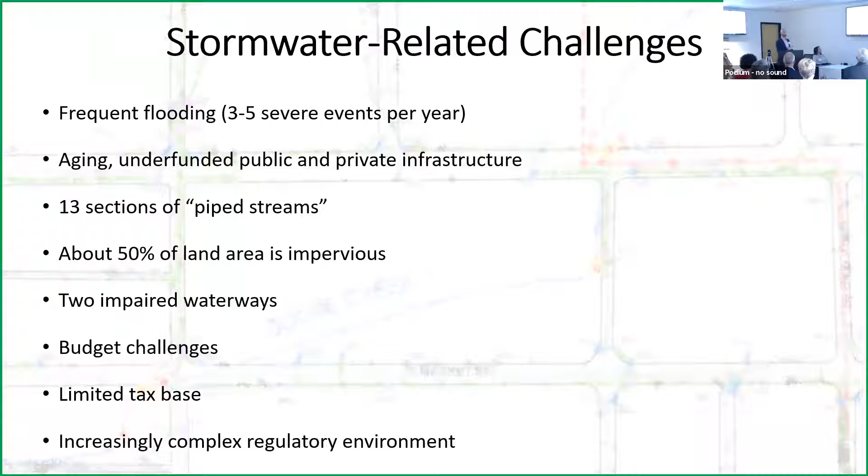We have 2 impaired waterways, budget challenges — what municipality doesn't — and a limited tax base. I think this is maybe somewhat unique to West Chester: we have a huge university campus, and it's the county seat. Those are not taxable entities. The value of the untaxable property is about 1/3 of our total property value, so in other words, we have to raise our tax revenue from the other 2/3. That's a challenge. And of course, an increasingly complex regulatory environment — in other words, here's the money-flying-away emoji.

So I talked about our impaired waterways. We have 2 pollution reduction plans with DEP. One is for about 75% of the borough, which is combined, covering the Brandywine Creek, Blackhorse Run, Plum Run, and Taylor Run stream sheds. The pollution reduction plan is to reduce the amount of sediment in those waterways.

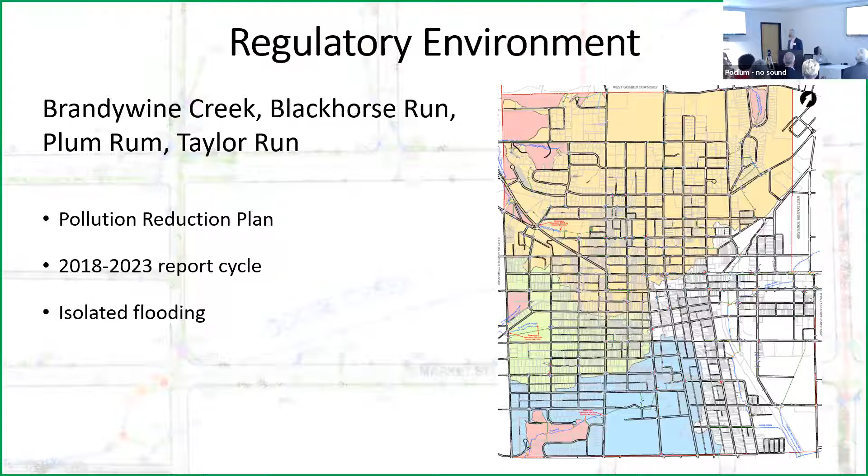And we have some isolated flooding here. A bigger problem is our Goose Creek, which actually originates right off of 202 by Paoli Pike and travels through West Goshen, comes down, and routinely floods the main route from 202 to Chester County Hospital. So we have a goal of reducing sediment in Goose Creek, and we also have a TMDL strategy for reducing phosphorus load in that waterway.

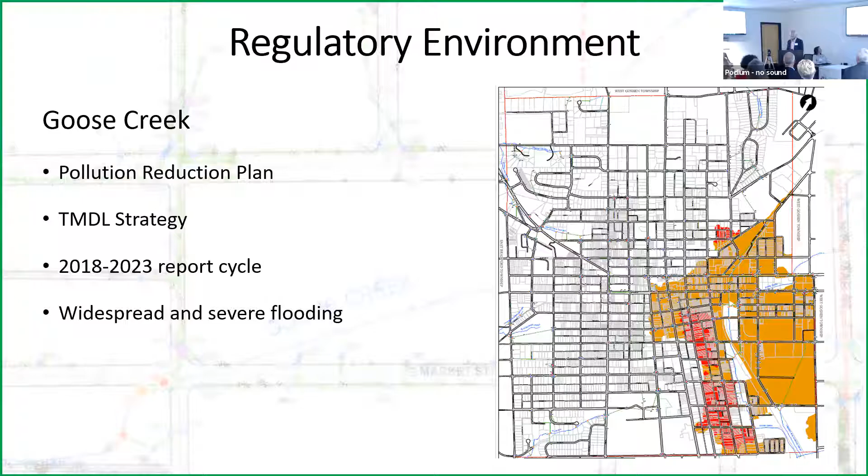Both of these are on the 2018 to 2023 reporting cycles with DEP. And with Goose Creek, we have widespread and severe flooding. However, it does provide recreation opportunities to the students from West Chester University.

So a lot of challenges. How do we address them? In 2013, the borough created a task force to look at all these issues, project costs into the future, and find a way to fund this stuff.

We looked at the existing infrastructure and the needs of maintaining that infrastructure. We looked at new infrastructure, staffing, administration, what it was going to require to get better about stormwater management. And we ended up projecting - this was a group of mostly engineers, but there were residents, there were politicians, but it was technical from the beginning.

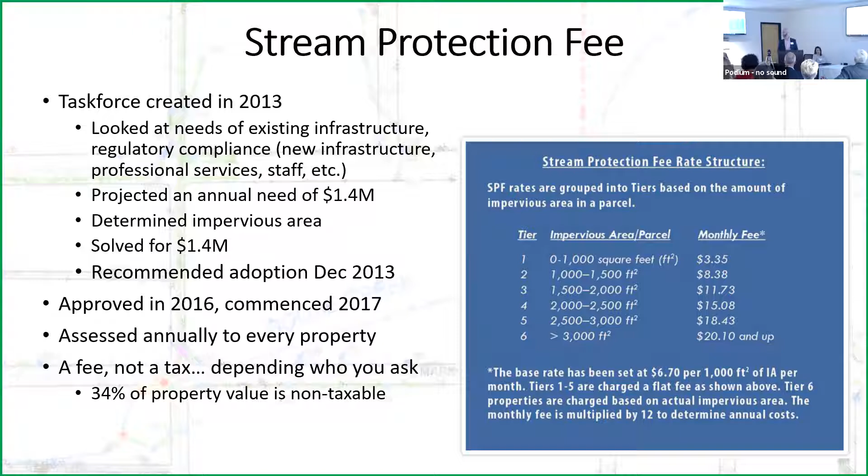And so we rolled this out in 2017, and the verbiage here is very intentional. We call it a fee, and we believe it's a fee. But depending who you ask, it's a tax. Of course, we want it to be a fee so we can assess those non-taxable entities and get them to pay into the problems that they're creating from a stormwater point of view. The university doesn't just own their campus; they own office buildings, residential buildings. They're truly an enormous real estate owner in the borough, and it was important, particularly, that the university pay into this.

So here's what it's for. On the right is the language in the ordinance, on the left is what that means day to day. First and foremost, managing the program - the MS4 permitting, plans, annual reporting. We just submitted our annual plan, which was prepared by a consultant. Illicit discharge detection and elimination, making sure primarily that the storm sewer isn't carrying sanitary sewer. That's the big thing.

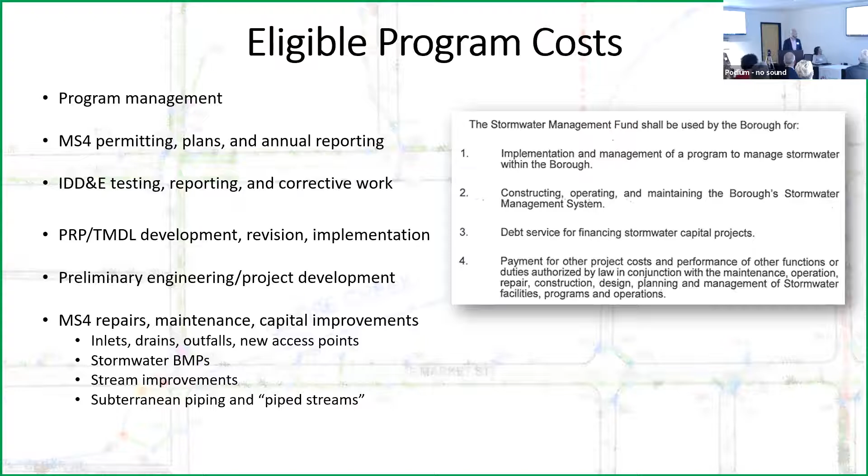Designing projects, teeing them up to actually be implemented, and then of course repairs, maintenance, and capital improvements to the existing system. This is what a typical budget looks like.

Mind you, I said we're billing 1.4, but our budget is about 1 to 1.25 million. That's because the university has challenged this in court, the fee versus tax question. Until that is resolved, and similar cases have been settled in favor of the municipality elsewhere in Pennsylvania, we're not budgeting their revenue because they're not paying it.

But this is what that money looks like year to year. About half of it goes into new capital projects for the upcoming budget year. About a quarter goes into maintenance of the existing systems. There's also bond debt up there from an original slew of projects that we did when we rolled this out.

You'll see an unfortunately large legal budget there, again going back to the university. Professional fees, that is the consultants and engineers I talked about, helping us with capital project development, capital planning, reporting, updating our reports, compliance, things like that.

We have personnel costs from public works, street sweeping in particular. That's a really high impact thing that we were already doing, but we get a lot of credit for doing it because we're taking so much stuff that would otherwise be swept into our waterways. So we were able to pay some of our public works costs there. And then admin is really a part of my time, and $11,000 for other stuff.

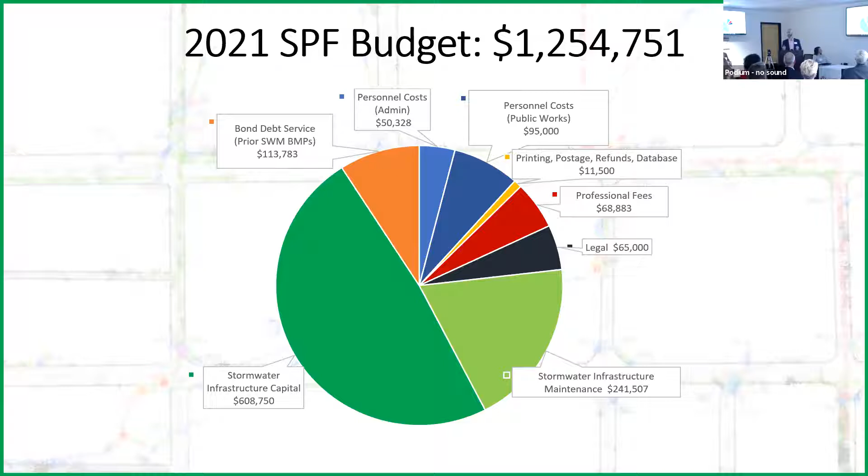Admin is less than 5%, and I'm exceptionally proud of that. That's very low for these types of programs.

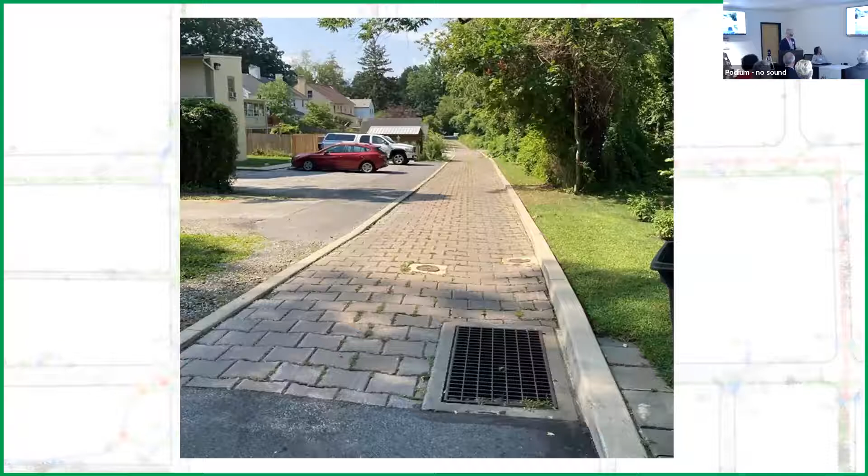So those were a couple of rain gardens. This was an alley that we completely redid, I want to say it's like 200 yards of permeable pavers. I'm not sure we're going to do more of this. We'll do it on small scale parking, or maybe a small parking lot or a couple parking spaces, maybe the downhill side of a parking lot.

But I mentioned maintenance issues. This is probably one of the most maintenance intensive. You can already see all types of weeds growing in the cracks between the pavers. There's crowning already, and if you've worked in stormwater, it's all about gravity and topography and making water go the way you want it to go.

When the road crowns, you might not necessarily be doing that as efficiently. So the left side of this alley probably doesn't drain too well into that inlet on the right side. There's a time and a place for this, but in terms of completely redoing streets with this type of solution, we probably won't do too much more of that.

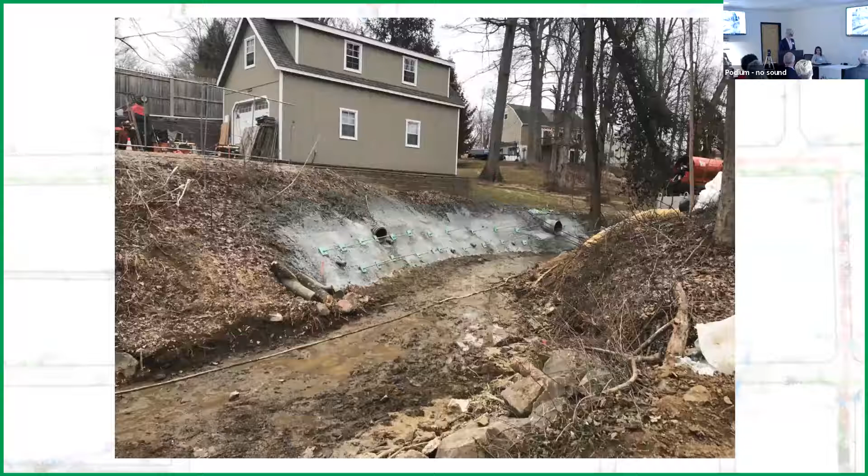This is one of our biggest projects to date. This is one section, there are 7 or 8 banks in this stream. This is Plum Run, actually. Most of this water originates on the West Chester University campus, goes downstream, totally ripping through neighborhoods after it gets to be more spread out and more suburban. So this is probably the diciest it got.

The garage was about to fall into the stream. So we did armoring and all sorts of stuff, new riparian buffers, things like that, to rebuild the bank, armor it towards heavy events, and really protect the property there.

Unfortunately, this type of work doesn't get us any credit towards our DEP regulations. I mentioned one of the things we have to do in both of our watersheds is reduce the amount of sediment in the water according to a DEP calculation. The whole purpose of this is to stop erosion, which is just sediment getting into the water, but we get absolutely no credit for doing this. This is a $700,000 project over 2 years. It was really about protecting a couple properties that were literally falling into the water. This doesn't really get us anywhere with DEP, and I think it's a little unfair, but it speaks to the challenges here.

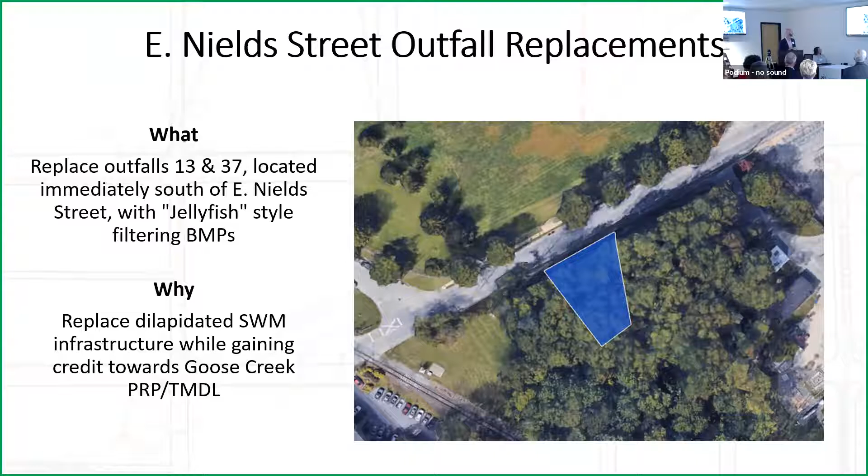Here's another one: replacing, there's a couple outfalls here, really old CMP pipe. We're replacing it with a new concrete outfall, and actually it's a big box that filters the water. There are multiple levels: the first level filters out trash, the second one leaves, and the third gets down to pretty fine particulate matter. That also gets a lot of credit towards our PRP and TMDL goals. We've never used them before, there's a pretty serious maintenance component to those, but it's a good opportunity to pilot that.

So future challenges: again, I mentioned the West Chester University litigation, very unfortunate. That's about 10% of the income we're not bringing in, and about 5% going back out the door to lawyers, which is very unfortunate. Inflation, hot topic right now, but these cost estimates are from 2013, that's 8 years ago now. So when we go to do these projects that we originally cost-analyzed almost a decade ago, we're finding some surprises.

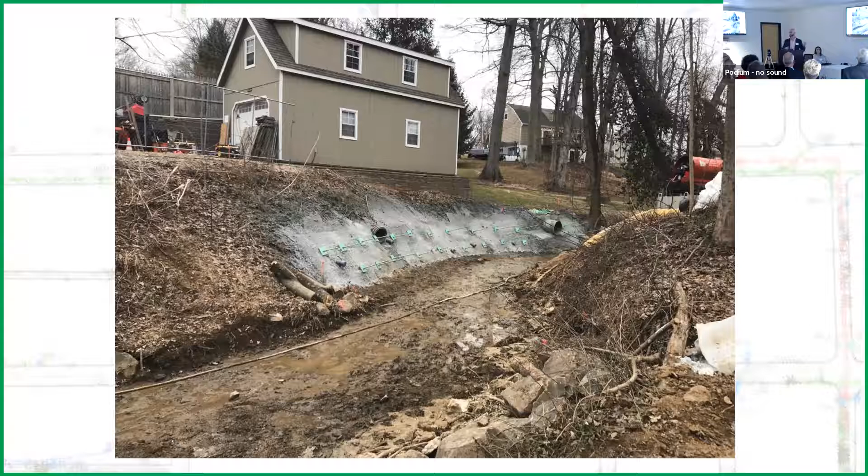Competing priorities for funding, of course, going back to this project: we have a garage on private property that's about to collapse into a stream because of stormwater mismanagement upstream. If we need to do this project or do something else to meet our PRP goals, we're going to do this project every time. But there's only so much funding, and unless we're going to raise that, we have to pick and choose between these priorities, and they're very significant priorities.

Public expectations too. I can't tell you how many people I've spoken to who say, well, I started paying this and my basement still floods every time it rains. And it's like, that's not what this is, that's your problem. We're working on it.

But there's just this expectation that, well, there's a fee for this now, and my pet project or my neighborhood's problems are going to be solved. Hopefully in the long run, but we're not there yet, and it's going to take a while to get there.

And also, with a storm like Ida, it's a very difficult conversation to have. You can't engineer your way out of that. There's nothing you can do. You can help a little bit, take the edge off, but those rain gardens are designed for an inch or less of rainfall. Ida, there's nothing you can do. We can't engineer our way out of those storms.

Maintenance, I mentioned again, every new BMP, best management practice, is going to come with future maintenance burden. So it's important to minimize those, or else your funding will go from capital heavy to maintenance heavy.

And then lastly, regulatory compliance. I sort of complain about that, but we are an environmentally minded community. We want to do the right thing, but it's complex. There are things that very much achieve the goals set for us by DEP that we don't get any credit for, and that's frustrating. So keeping up with those as they change, that is a future challenge for sure.

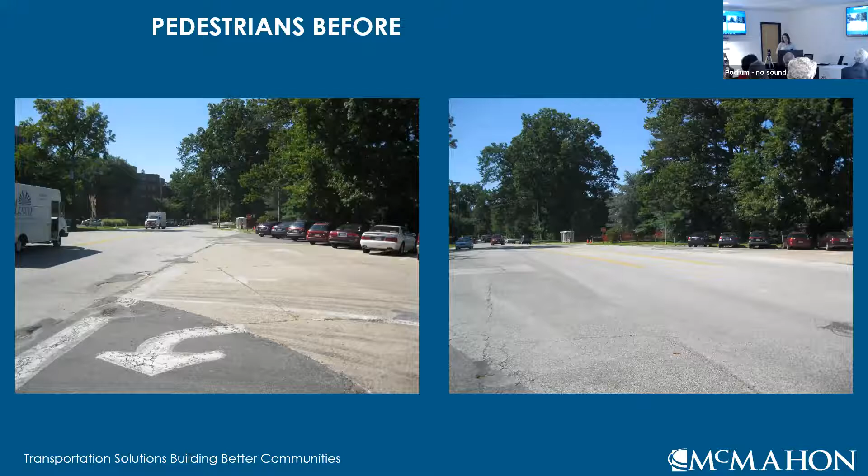You see here some of that angled parking that we saw in the overhead. This is really kind of sitting in the intersection, a very wide swath of pavement. It's an uncontrolled intersection, so from a pedestrian standpoint, what was the message of this intersection? Well, it's pretty much go somewhere else. This is a 90-foot wide uncontrolled intersection, and there was signage in place for no pedestrian crossings, but we know that sometimes people turn a blind eye to signs.

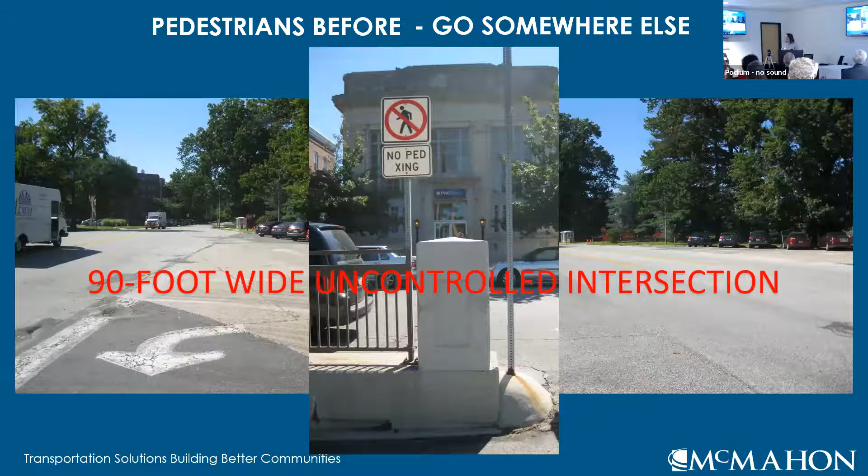And while there wasn't a significant pedestrian crossing issue at this location prior to the project, there was a need. People wanted to cross back and forth, and certainly the project proposed by the college increased that significantly. The inn was putting a bar into a dry borough, so it became a very popular destination very quickly.

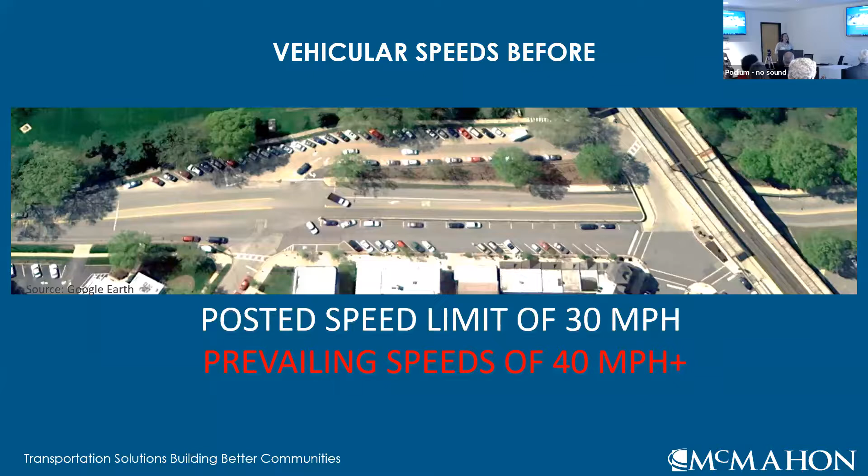So obviously, the roundabout had a transformative impact on speeds, but I will note just to the north of this image, we also, subsequent to the roundabout, did a project for the college installing a new long-term parking lot. As part of that parking lot project, we installed a mid-block pedestrian crossing, which included a median, which we'll see next.

In cooperation, the two projects really worked together to impact vehicular speeds. So the roundabout itself, we kept the 30 mile per hour posted speed limit along 320, but we installed features that would really force people to drive those types of speeds. The roundabout itself has a 20 mile per hour speed.

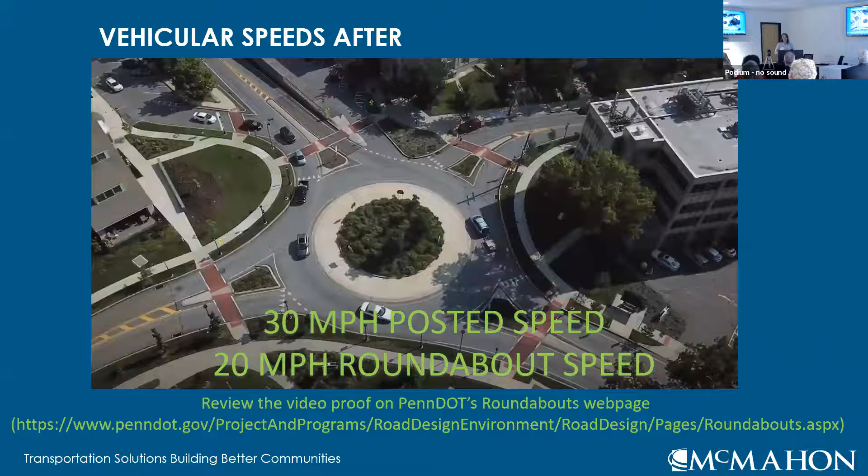I've noted here in the link, which you, I think, will have access to the presentation after. If you Google PennDOT roundabouts, they have a statewide roundabouts page, and our Swarthmore video is highlighted on that page. You can see for yourself, this is just a screen capture, but you can see some of the drone footage that we took, and you can see the speed compliance as drivers are navigating through that roundabout.

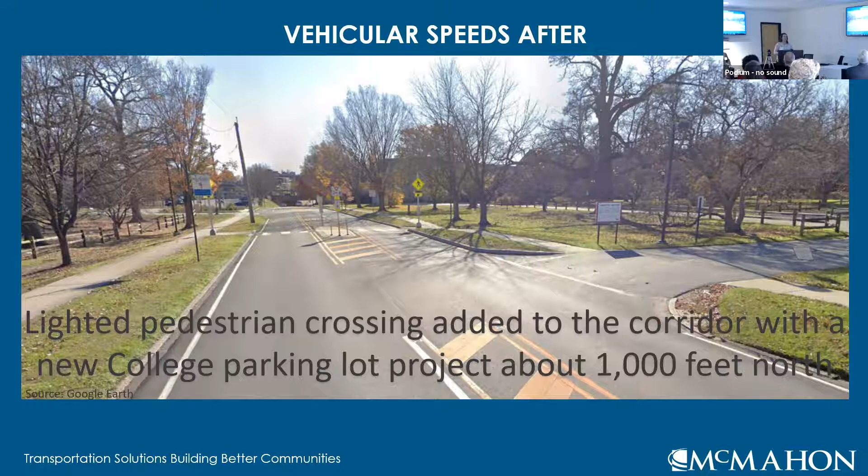So this is immediately north of the roundabout. You can see in the background of the image that Septa underpass, which once you pass through that and come up the hill, you come to the roundabout. So they both, in cooperation, had an impact on speed so that we could get a little bit more compliance with some of those travel speeds even north of the roundabout.

From a vegetation and stormwater management perspective, in general, roundabouts provide a lot of opportunities to incorporate green space in an intersection. When you look at the Swarthmore before and after, you can see that. Not only within the central median, but around the intersection itself, we were able to reduce the total impervious surface, the total pavement at this location. So typically, roundabouts of this nature do often reduce your overall impervious surface, and that was certainly the case here.

With this particular project, because the intersection was part of the larger development project, we do not have stormwater management facilities within the central island, but that's very common. We'll see that on the next roundabout project I'm going to touch on very briefly.

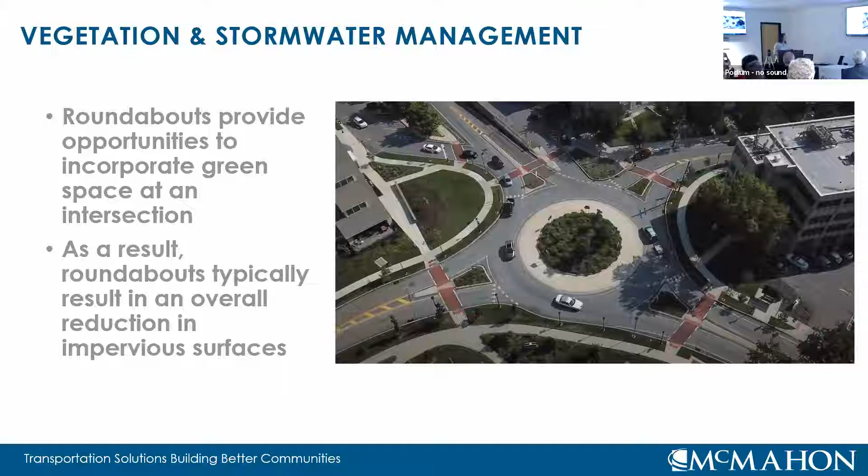So here is another single lane roundabout. This one is actually in Luzerne County in Dallas Borough near Misericordia University, if anyone's familiar. This is a project we actually did for PennDOT, Engineering District 4 up in that part of the state.

This one is an example of a roundabout that we did use the central island for some stormwater management. In this case, it's just a grass surface. It was kept relatively simple to keep maintenance costs down.

You can see it's a similar vantage point there on the images on the right, the top being the before. It again was a very wide intersection with the longest pedestrian crossings being 85 to 90 feet. It was a 5-leg intersection, so it's really a swath of pavement.

You see on the left side of that top image, there was an abandoned gas station at the intersection. PennDOT was able to purchase that property and knock down that gas station and remediate that property. So it gave some extra space, and you see a lot more green around this intersection in that after picture.

Again, not just within that central island that we might traditionally think of as the opportunity for green space. So this particular project, from a standpoint of the landscaping features, we were able to install a rain garden as part of this project, and we were also able to do some soil amendments, which were used to promote that infiltration.

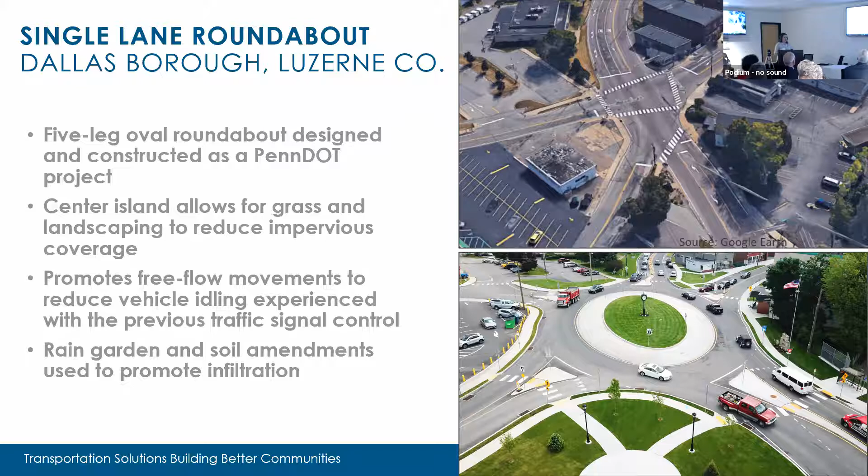So a couple other projects I wanted to touch base on given today's topic. These ones might be familiar to some of you in the room. They're a little bit more local than the last project. This one is the Paoli Pike shared use path in East Goshen Township, about a 2.7 mile shared use path running east-west throughout the township along the Paoli Pike corridor.

It was significantly funded by grants. It's been broken down into 7 different segments, and there's only one segment remaining, looking for grant funding to be able to finish that. But I wanted to raise this project briefly.

We used pervious asphalt pavement throughout the project. When you're talking about a trail that's about 2.7 miles long, it becomes pretty significant, even though it's just a trail in terms of its width. It really enabled us to reduce stormwater runoff and impacts from that perspective.

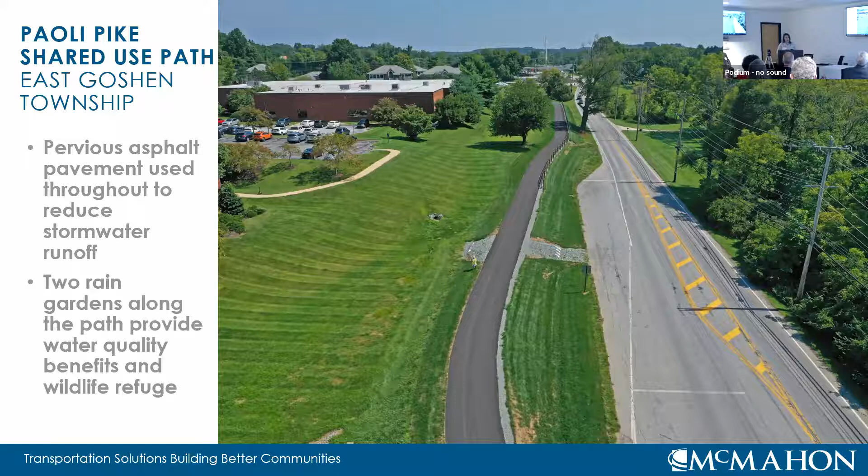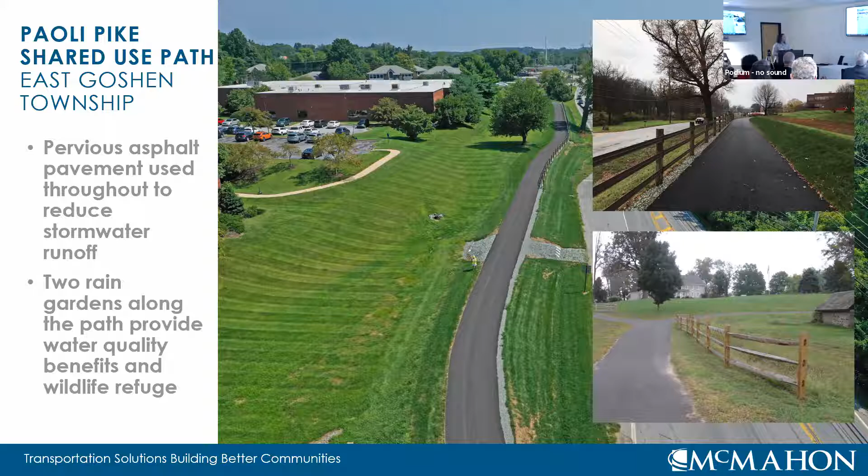We were also able to install 2 rain gardens along the path that provide additional water quality benefits and some wildlife refuge. In these images on the right, there's a rain garden in the lower image behind that fence area - that's all rain garden. This was pretty early on, so it hadn't grown up much yet. We need to go out and get some new photos of that. And the top image shows a closer view of the pavement surface.

And then lastly, I wanted to touch on this project - one we completed for the Land Conservancy for Southern Chester County. Again, might be familiar to some of you. This is along Chandler Mill in Kennett Township. They were looking to do an enhancement project for the nature preserve and the Interpretive Nature Center, and this installation involved a parking area.

We did a lot of research on different pavement types for this project. Of course, they wanted to be as environmentally sensitive as possible, and so what we settled on here was a pervious concrete pavement surface. This reduced our impervious footprint, and it also helps to remove pollutants from the parking area.

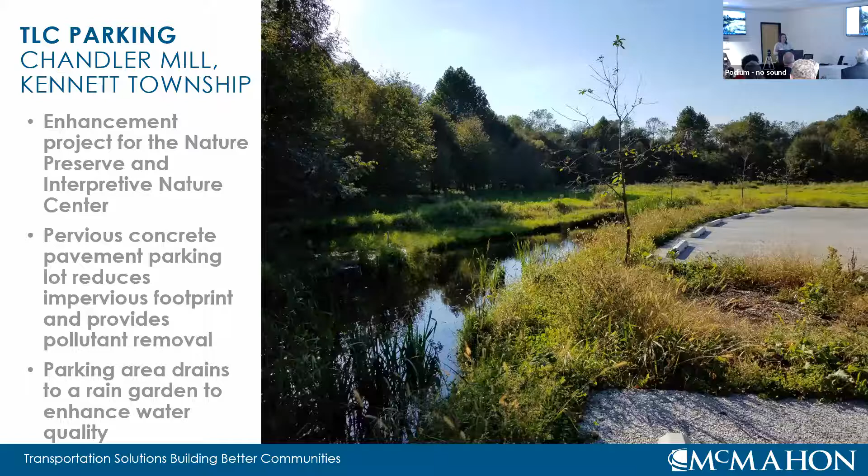You've got vehicles sitting there, and some may unfortunately have some leaking - this surface is able to address some of that pollutant removal. And then the parking area drains into a rain garden, which enhances water quality as well.

Here are just a few images. We were luckily able to capture a few images from Google Earth history - an overhead shot of the before, showing a very basic parking area. And then on the right side, 2 after photos. The top one happened to be during a time of year where we could see it because the leaves were down, but during full foliage it kind of blends in with that natural environment. They're very happy with the way that project turned out.

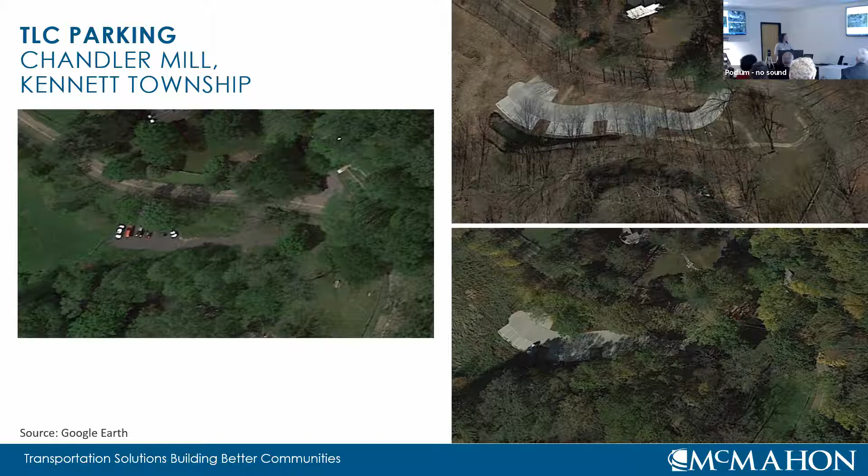So just a couple other projects I wanted to touch on given today's topic. Appreciate your time, thank you.

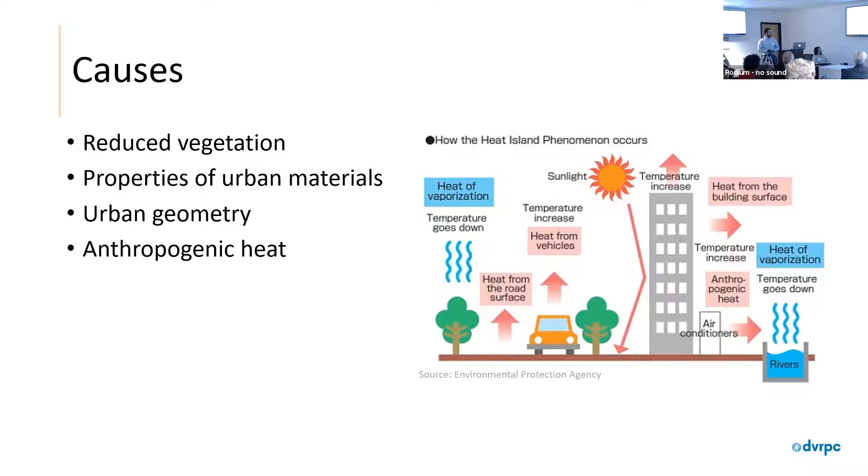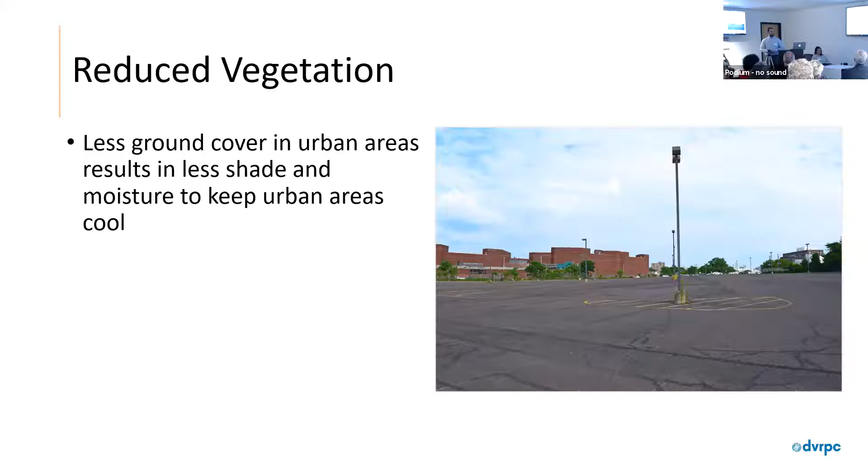Fairly self-explanatory: in urban areas, there is not as much vegetation. This reduced ground cover results in less shade and moisture to keep urban areas cooler. Both of those are very core components of urban heat islands, and the reduction in vegetation results in less shade and everything.

Urban materials themselves: darker surfaces reflect less heat, meaning they're absorbing that heat. Stone, concrete, brick, etc. have the ability to absorb that heat and then slowly release it throughout the day. So when you're walking by a brick wall that's been hit by the sun all day long, you can feel the heat coming off of that brick wall as well as from the sun. The materials themselves are significant sources of urban heat islands.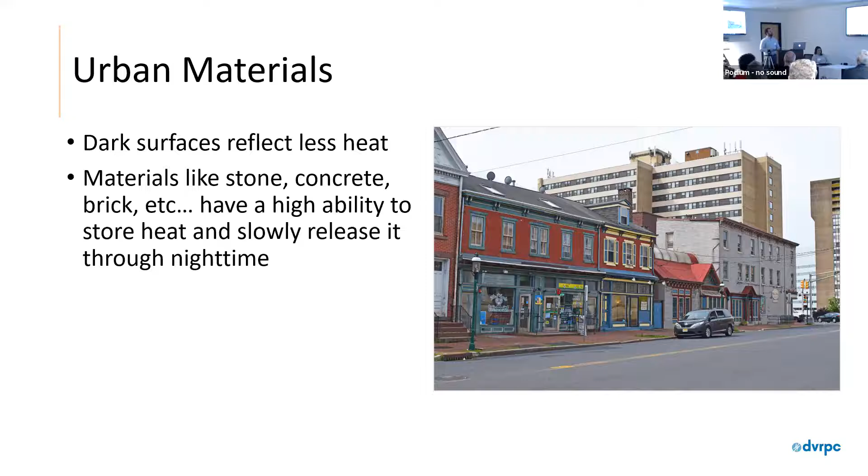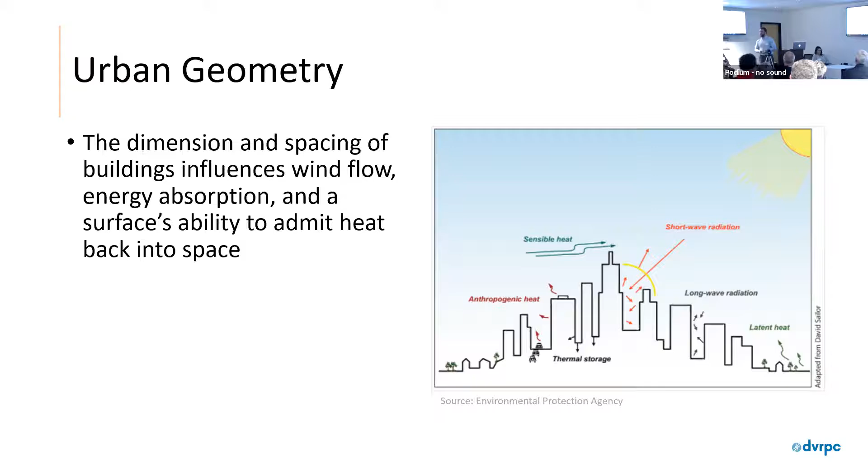Urban geometry is slightly less intuitive, but as buildings are clustered closer together, the heat that's radiating off those surfaces doesn't get a chance to be dispersed by the wind into the atmosphere. It hits other urban surfaces and gets absorbed there as well - the heat is just bouncing off of buildings that are closely tied together. The other part is those buildings are blocking the wind, which would disperse this heat, so it creates eddies or still areas where that heat can't really be dispersed.

And then anthropogenic heat - human-caused heat from heating and cooling systems, transportation, industrial processes, etc.

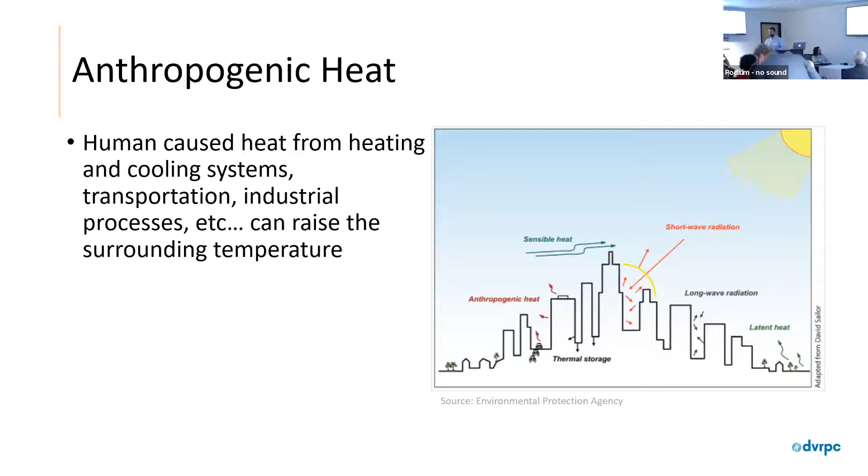And so all of these causes come together to form three types of urban heat islands. This is really important as we're talking about solutions, because each one has a slightly different way to mitigate it. The two primary ones are surface and canopy layer.

The surface heat island is when you're walking across a hot asphalt parking lot - maybe you just got out of the pool and you're going to your car in flip-flops or bare feet, and you feel that heat coming off of the asphalt. That's the surface heat island.

The canopy layer is from the surface up to just about rooftop or treetop level - kind of the air that's stuck where our faces are, where our heads are. That's what we most commonly perceive as an urban heat island, because it's the most readily experienced.

And then there's the boundary layer, which we included just to give you a scope of how urban heat islands can have an impact. The boundary layer goes from the treetop or rooftop layer up to a mile into the atmosphere, and that heat can affect weather patterns and areas downwind of an urban area. But it's less common.

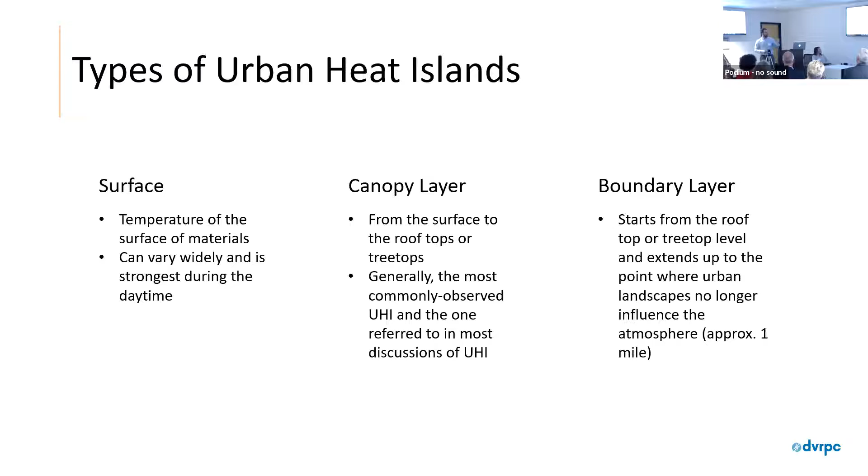The first two, the surface and the canopy, are the core urban heat islands that we tend to associate with the word.

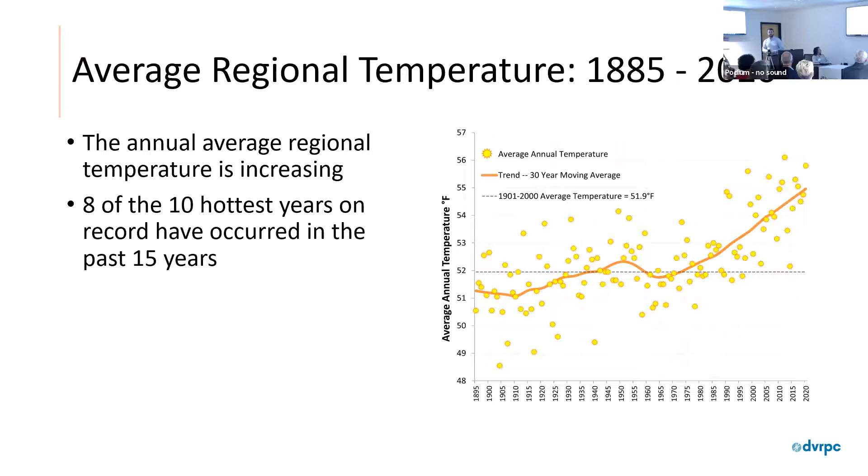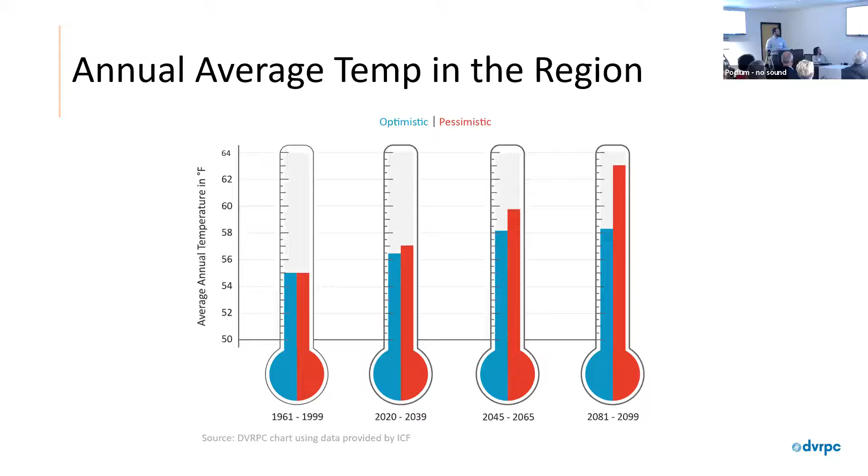The annual average temperature is increasing. We've had some significant hot years recently. The annual average temperature in the region is also dependent on two pathways, which, as we get farther into the century, will have somewhat divergent impacts, but either way, the area is getting hotter.

More importantly, these pathways broken down show how many days you'll have over a specific degree in a year. As we're starting to see, not only is the annual average temperature increasing, but also the days where the heat index gets to a point where public health and other conditions become much more important. In the most significant pathway, by the end of the century you will have extended periods of time that are over 90 degrees Fahrenheit.

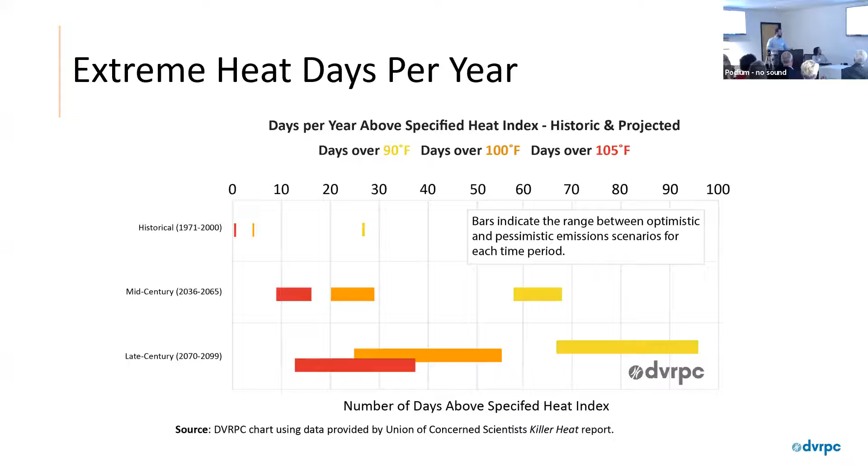As urban materials absorb that heat during the day and release it during the night, the body needs to be able to cool down at nighttime. If you don't have that, it makes it much harder for people who are at risk of these health impacts, and something to be taken into consideration.

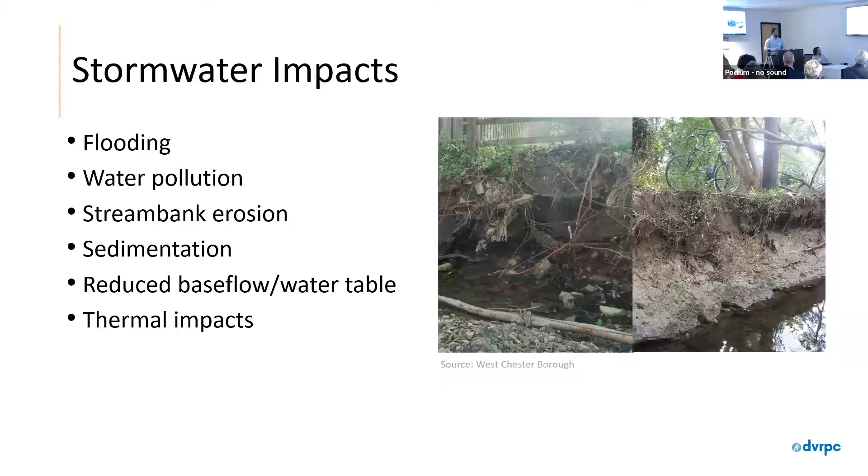Just as climate change will impact the heat, it will also have some impact on the precipitation, although it's kind of hard to say for certain scientifically how much that impact will be. We can say with a very high degree of confidence that there will be more rainfall and more of it will fall in more extreme events, all at one time, kind of like we saw with Hurricane Ida a few months ago at this point.

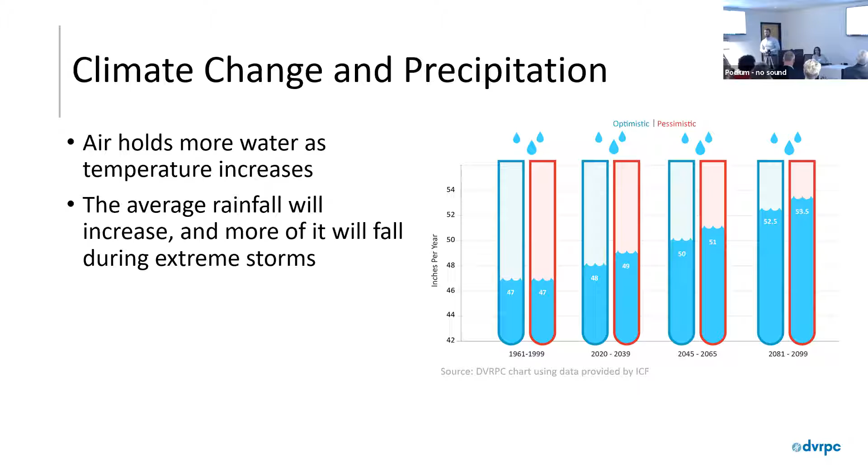So all of these issues are going to be much more prevalent moving forward as well. So, street trees and urban trees - trees sit at the nexus of all of these issues, and they are incredible resources for a community to help mitigate and just provide for a much nicer community overall.

For heat, the shading provided by trees is one of the most significant parts of how they impact heat. You're looking at a 20 to 45 degree temperature difference just with the shade of a tree in a community.

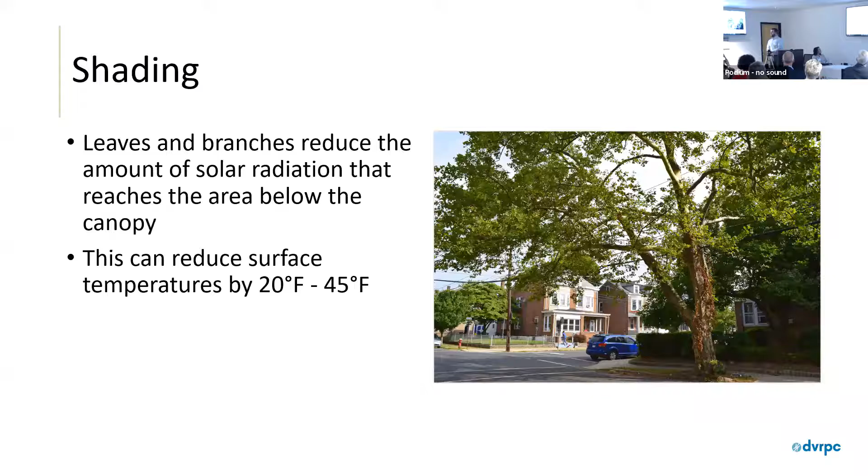And then evapotranspiration - apologies, it's a fairly long word, but it's the combination of transpiration, which is when trees and vegetation absorb the water and then release it through their leaves, and evaporation, which is when water sitting on the leaves gets evaporated into the air.

This reduces the temperature of the surrounding area because heat is a fuel source, and the evapotranspiration absorbs the heat from the surrounding area to fuel the chemical reactions of evaporation and transpiration. So fairly small impacts, just a couple degrees Fahrenheit, but somewhat significant in a largely forested area.

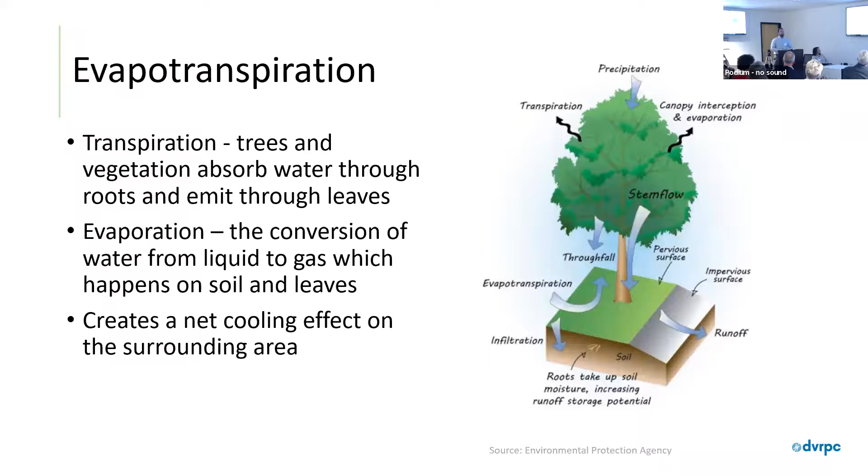Trees also have significant help with stormwater. Canopy slows the rainfall down, so there's less of an erosion impact when it hits the ground. Trees capture and store some of that rainfall. The roots break up the soil to allow better infiltration and absorption of water into the soil, slowing down runoff, and can help transform and filter pollutants as well. So trees have immense and measurable impacts both on heat and on stormwater.

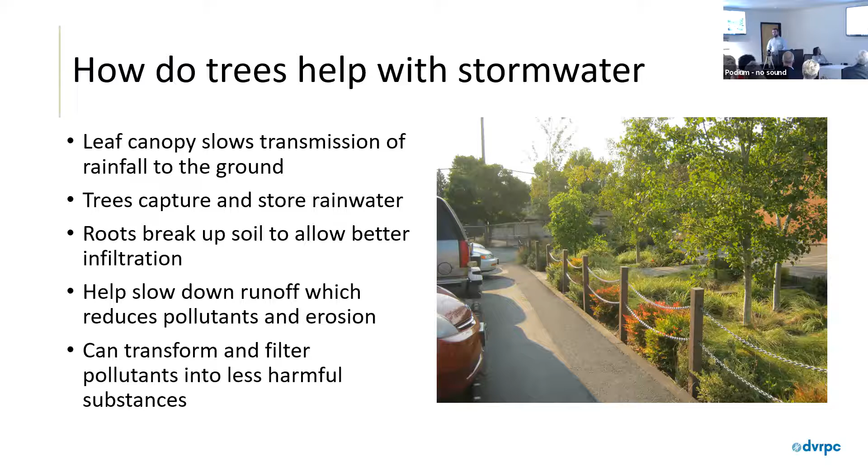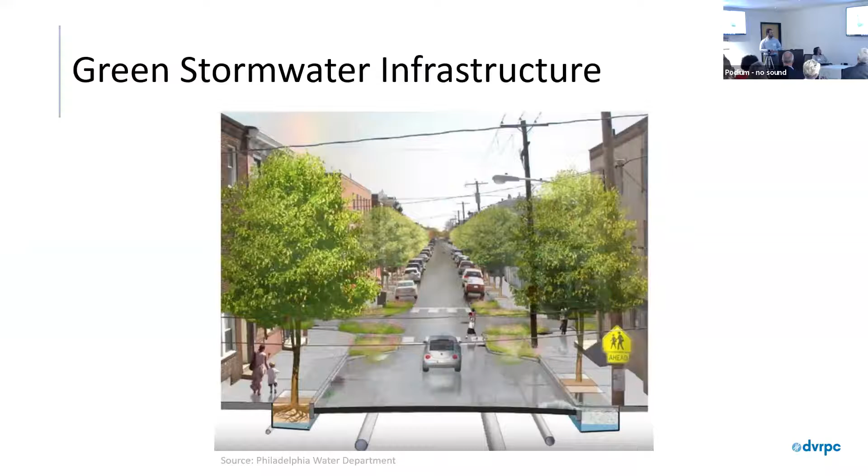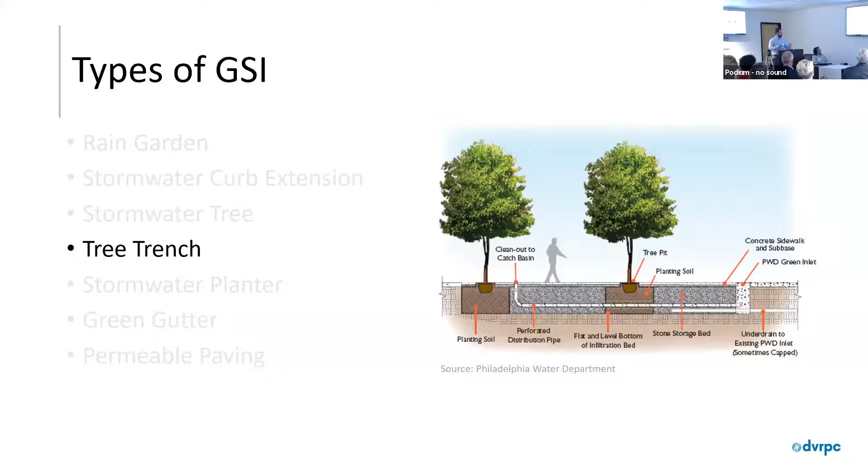I'll fly through this since it's already been well covered. Green stormwater infrastructure is essentially the way of putting trees and vegetation in, around, on, and underneath the urban environment, integrating all of these things together. You can have regular streetscapes with trees and vegetation, rain gardens, curb extensions, trees, tree trenches, which connect trees together with underground infiltration systems, stormwater planters, green gutter which is a slightly narrower stormwater planter, and permeable paving. All of these are different ways of packaging trees and vegetation into the urban environment.

The benefits are things people have talked about and seen in their day-to-day lives. It reduces stress on your existing stormwater infrastructure, helps protect natural resources, parks, or the Chesapeake Bay further downstream, reduces the heat island, and looks a lot nicer. It provides habitat for insects, animals, and other wildlife, and helps with traffic calming.

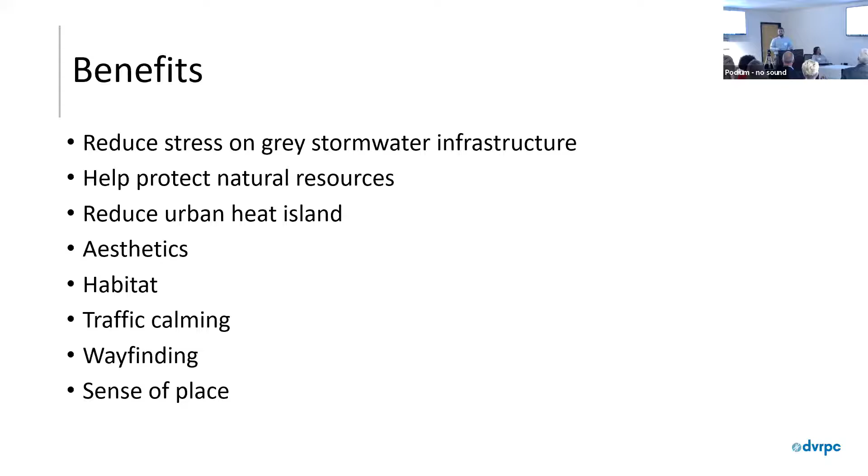People tend to slow down, and I feel like there's a study on this, but just having green areas, roundabouts with greenery, provides for a calmer environment. There's also wayfinding, people will identify a particular bump out, saying that bump out looks great, or that one doesn't. These become community assets that people can use for wayfinding, and they create a sense of place and community, connecting people with trees and vegetation again.

All right, so now I'm going to hand it back off to Chris.

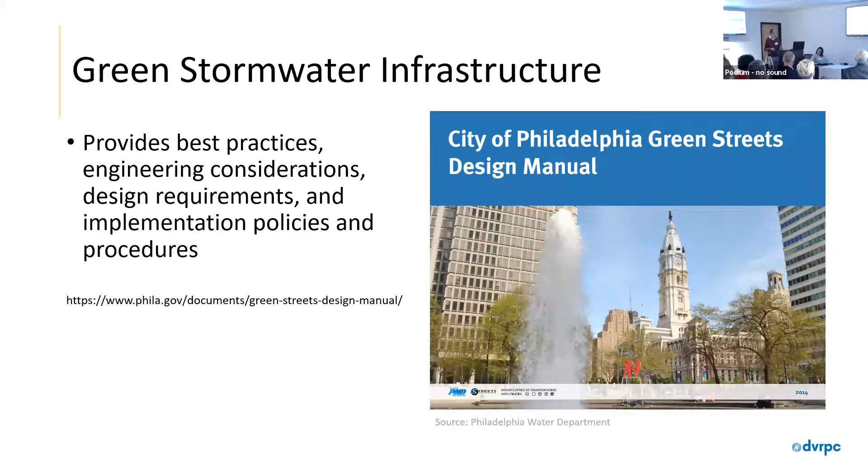Our partners that we work with also provide a lot of great resources on these topics. Philadelphia has a great Green Streets Design Manual, the link is up there. Another invaluable resource we've used is from the Penn State Urban Forestry Extension. They have a lot of good publications and technical resources around community forests and street trees, covering all issues from planning and maintenance to cost and implementation.